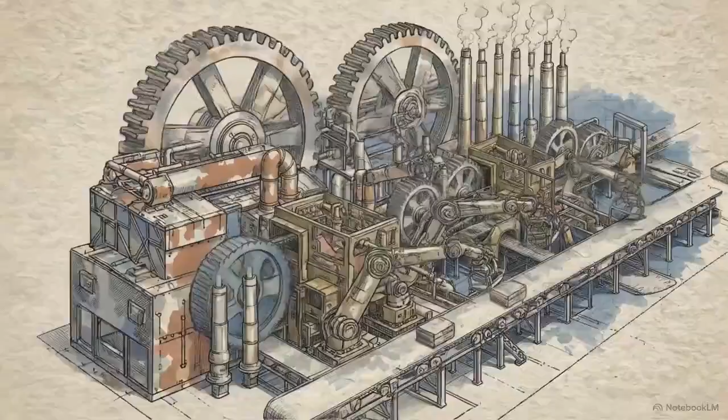Step into any heavy industrial facility, and you are immediately confronted with thousands of complex machines running at once. Maintenance and reliability teams are responsible for managing anywhere from hundreds to thousands of these individual physical assets across an enormous footprint. Without a rigorous architecture in place, simply keeping track of where every single piece of equipment is physically located creates an immediate administrative crisis.

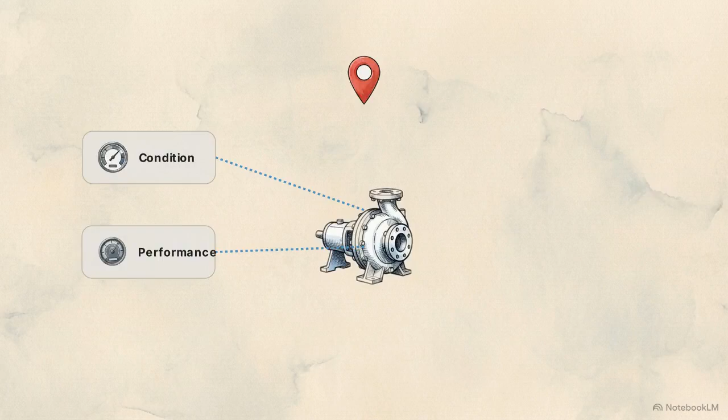Location is only the first variable. You also have to track the real-time physical condition, the operational parameters, and the complete maintenance history of each machine. To manage these thousands of moving variables at scale, organizations rely on a specific structural tool: the asset register. An asset register is a centralized database containing the exact technical and financial details for every physical asset owned by a company. It takes a sprawling physical landscape and maps it into a precise, relational, digital network. It serves as the definitive source of truth for the entire operation.

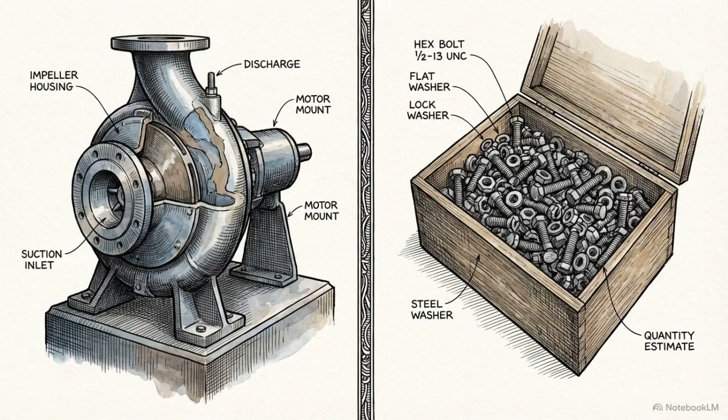An asset register serves a distinct purpose from a basic inventory of consumable parts. Inventory systems track supplies meant to be used up or sold. The asset register tracks long-term property, plant, and equipment that generate value over years.

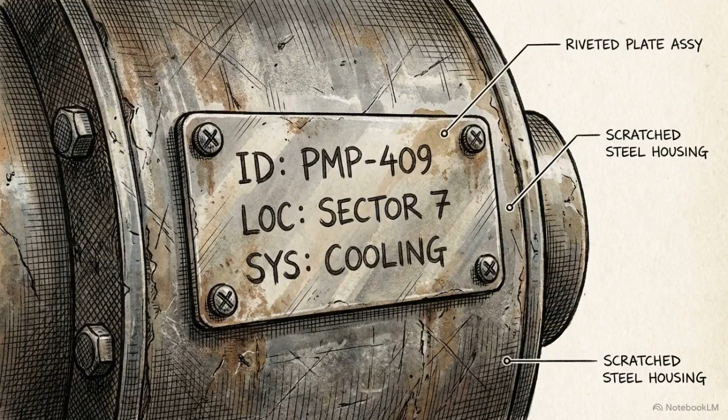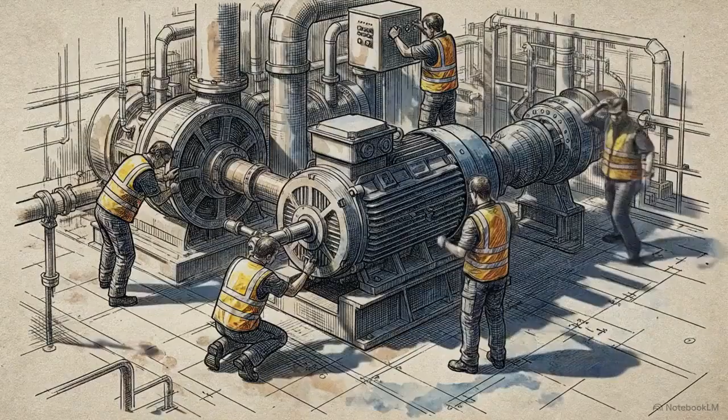Inside a maintenance management system, the master data layer handles the static identifiers, the specific equipment tags, the designated locations, and the hierarchical relationships. The asset register extends that static master data by capturing every dynamic, transactional event that occurs throughout the equipment's lifespan. Master data gives the machine a name tag. The asset register records its operational DNA over decades of active service.

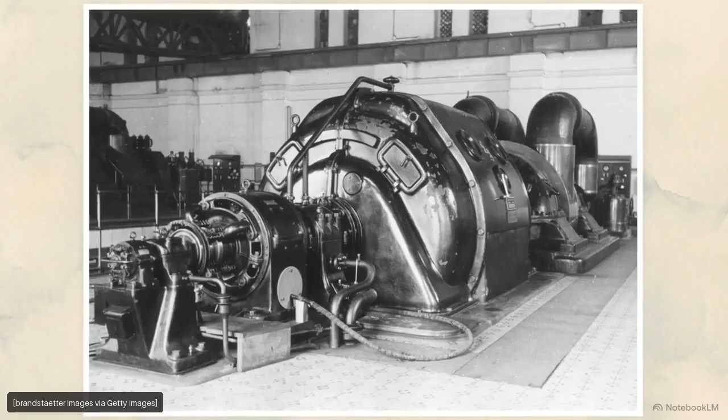Let's look at the complete life cycle data profile required for a single piece of high-value rotating equipment, like this compressor. The record begins in the planning phase, capturing the initial design specifications, manufacturer constraints, and operational requirements. Moving into the acquisition phase, the database logs the exact purchase date, the original capital cost, and the specific parameters needed for financial depreciation. Next is the operational phase, which explicitly stamps the date the equipment was officially commissioned and put into active service.

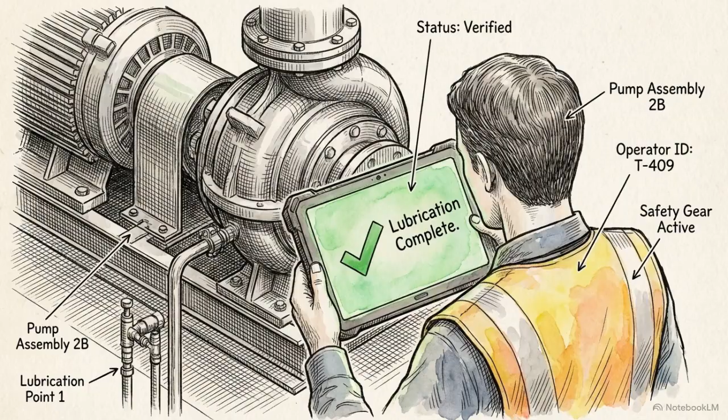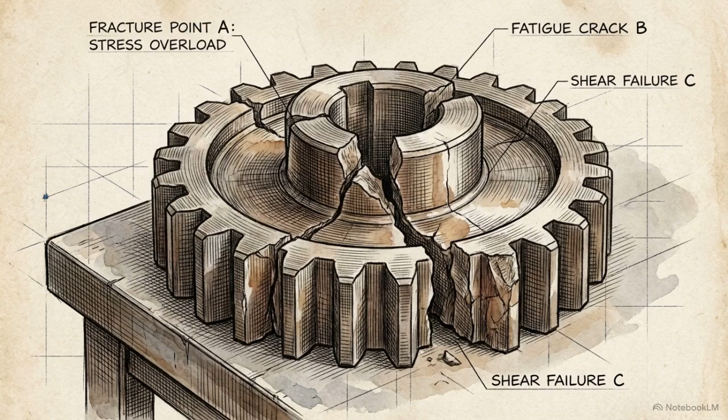From that day forward, every routine preventive maintenance task, lubrication cycle, and inspection result is appended to the asset's history. Any unexpected breakdowns, component failures, or major mechanical overhauls are also permanently etched into this profile. Finally, when the machine reaches the end of its life, the register documents its retirement date, its estimated salvage value, and the specific decommissioning details required for financial auditing.

By capturing this uninterrupted end-to-end timeline, organizations can calculate accurate lifecycle costs and make mathematically sound decisions on whether it is cheaper to repair an aging machine or buy a new one.

Collecting massive amounts of lifecycle data is useless without a standardized taxonomy to organize it. Globally, this architecture is guided by standards like ISO 14224. Under this standard, open-ended text fields are replaced with strict drop-down menus and standard failure codes, so the data can actually be aggregated and analyzed later.

The asset hierarchy organizes equipment into a strict relational tree, cascading from site down to individual components. This structure ensures downtime data rolls up accurately from every component. You must separate this hierarchy from a P&ID, as they serve different functions. The hierarchy dictates the data and reporting structure, while the P&ID maps the actual functional flow of fluids and gases through the physical plant.

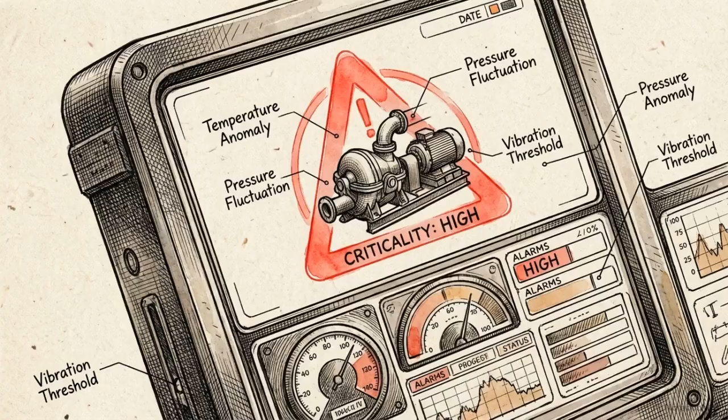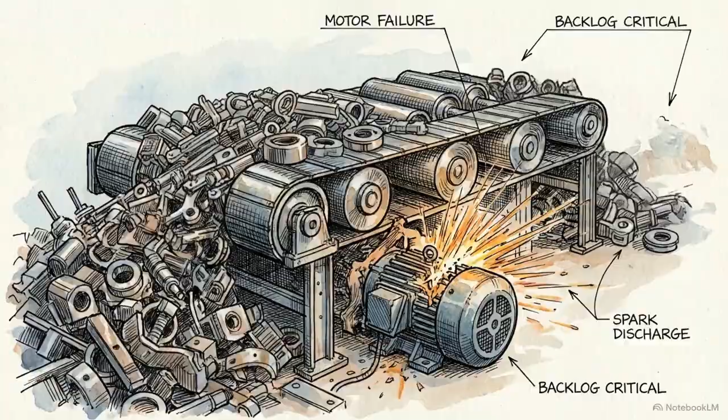The final piece of this structural framework is Asset Criticality Ranking, or ACR. ACR flags equipment based on its direct consequence of failure. It systematically identifies which machines will cause immediate safety hazards or total production bottlenecks if they go offline. By enforcing strict hierarchies and accurate criticality rankings, you ensure that highly limited maintenance labor and expensive spare parts are directed exactly where they are needed most.

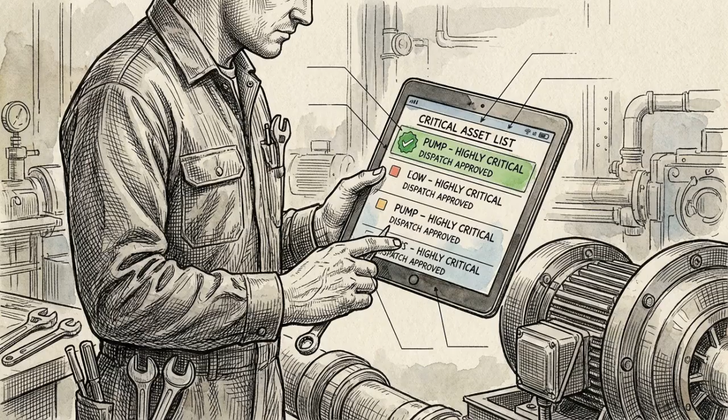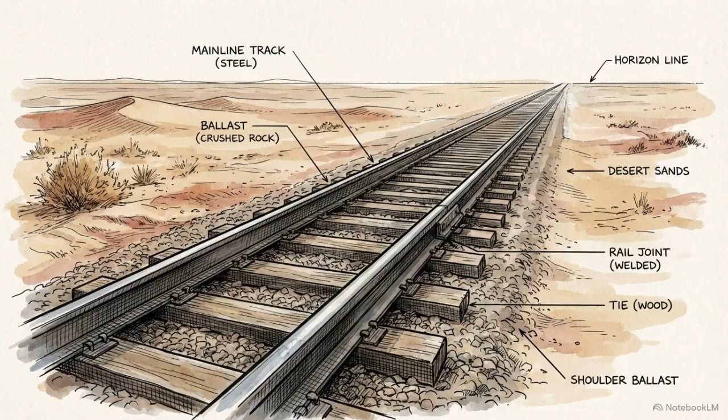Not all assets fit neatly into a single building. Many industries manage continuous infrastructure networks, known as linear assets. You cannot track a 50-kilometer pipeline as a single discrete unit. Instead, it must be mapped out as a series of specific segments or nodes. Each length of pipe is logged with its own distinct GPS coordinates, its specific material composition, diameter, and exact date of installation.

Utility networks follow the same logic. Electrical transmission lines are mapped segment by segment, tracking specific voltage capacities and individual structural towers across the grid. A rigorously designed asset register is flexible. It possesses the capability to map and track any physical topology, no matter how expansive the industry.

The greatest threat to this system is human error. Over time, databases experience data drift, the inevitable decay of accuracy as physical reality outpaces digital records. When equipment is modified, relocated, or scrapped in the field, and those events aren't immediately logged, the register actively drifts away from reality. Consider an example from the heavy mining sector involving large-scale haul trucks.

If 3 identical trucks are entered into the system by different technicians as CAT 793, CAT 793 haul, and 793 truck, it shatters the data structure. Because the system reads them as entirely different classes of equipment, it generates duplicate preventative maintenance schedules and corrupts the financial cost reporting.

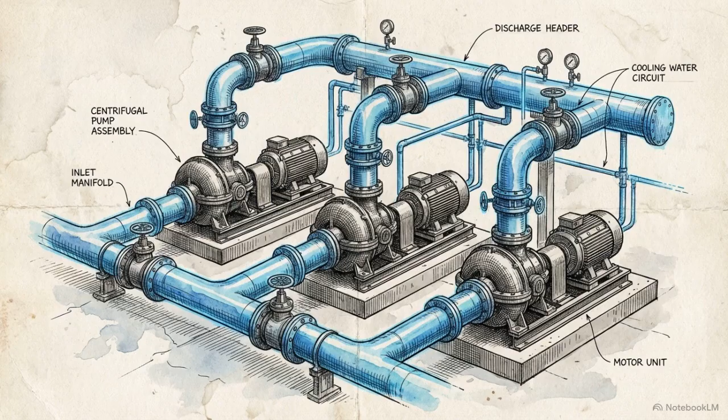Or take a water utility, where engineers record the output for identical pumps using conflicting pressure units, PSI for one, kilopascals for another, and bar for a third. Analyzing performance trends across those pumps becomes impossible. These small inconsistencies compound rapidly. They leave dead ghost assets lingering on financial ledgers and directly break the accuracy of reliability models.

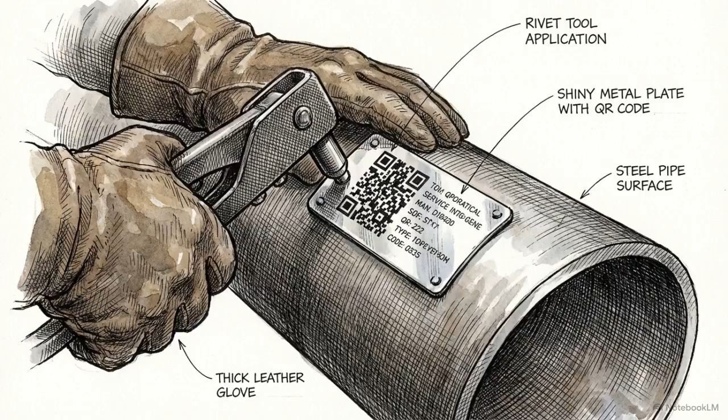Defeating data drift requires establishing strict master data governance policies from day one. Managing assets on basic spreadsheets creates systemic risk because they lack user access controls and provide zero audit trail for changes. On the physical layer, mitigation means affixing durable, scannable QR codes or RFID tags to every single piece of equipment in the plant. When field technicians scan those physical tags before beginning a repair, it guarantees that every labor hour and spare part is logged against the exact correct machine.

On the digital side, you have to engineer the software to force data compliance. The system logic must require a mandatory check, asking, "Did asset information change?" before a technician is permitted to close out a work order. High-integrity data is maintained through hard-coded workflow integration, rather than manual administrative oversight.

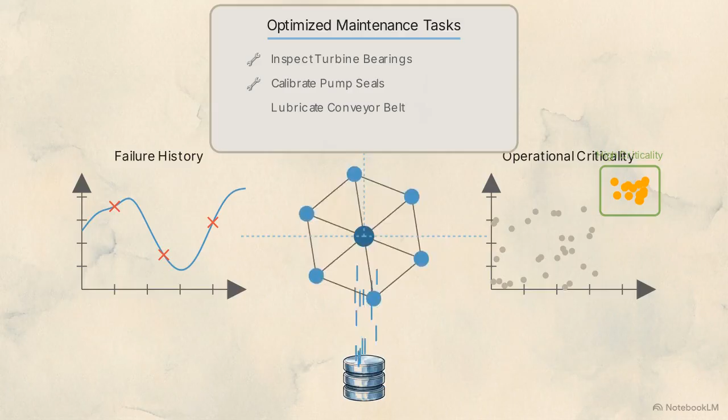A standardized asset register provides the analytical foundation for advanced maintenance methodologies, like reliability-centered maintenance, or RCM. RCM is designed to mathematically optimize maintenance tasks by analyzing an asset's past failure history and its current operational criticality. But those complex RCM models will fail instantly if the underlying historical data feeding them is fragmented or corrupt.

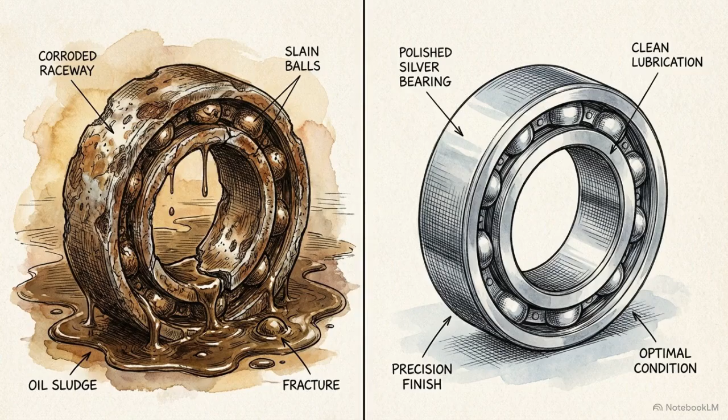By aligning the register's architecture with the ISO 14224 data structure, organizations can take their localized failure data and accurately benchmark it against global industry peers. An uncorrupted, highly structured asset register is the non-negotiable prerequisite for graduating from reactive break-fix repairs to true proactive reliability.

The value of this digital backbone extends far beyond the maintenance department. It serves as a unified reference point for the entire business. The exact same dataset is utilized by finance to calculate precise depreciation, by engineering to map plant expansions, and by operations to assess risk. This cross-functional alignment fulfills the core principles of the ISO 55000 standard for strategic asset management.

By engineering and rigorously protecting a dynamic asset register, organizations eliminate operational silos, quantify their technical risks precisely, and drive genuine data-driven reductions in the total cost of ownership.